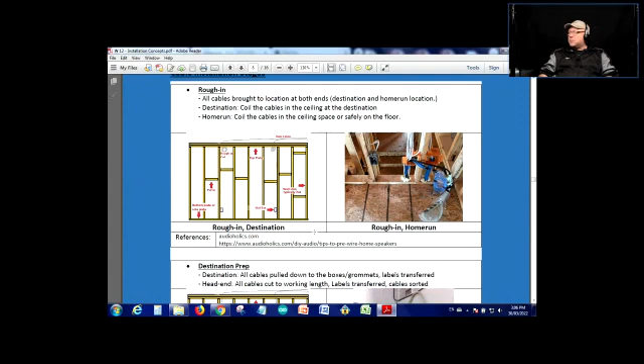All right. So we're going to finish up what we started last time. We talked about possible routes for wiring, and today we're just going to finish that up. I didn't want to rush that because when we rush things, some things might not be covered properly. All right. So today we'll talk about the cable installation or device installation stages. And there's some terminology involved in that.

So the first thing I'm going to talk about is the rough-in stage. And rough-in, I'm going to read that: all cables brought to location at both ends, destination and home run location. So let's distinguish the destination and the home run location. Destination would be where the devices are going to be mounted. So let's say, for example, there is a wall-mounted box or wall box

and you're going to run cables from the home run location, which would usually be a LAN room or some sort of communications closet, right? So all the cables home run to that. And you're going to run the cables from the home location to the destinations all over the place, wherever they might be. And we're not going to install them yet. We're just going to bring the cables there, and we're going to coil them in the ceiling.

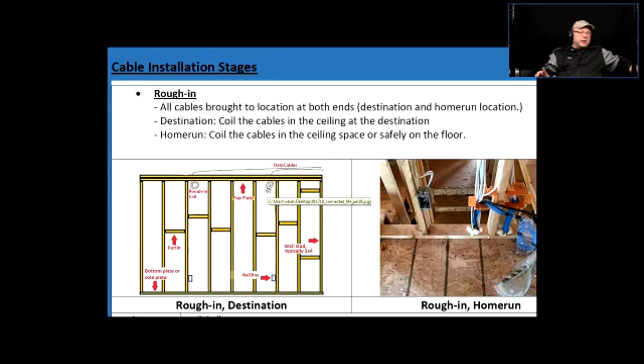All right, for example, like this here. Let's say these are the data cables, and you're just going to bring them to the location, coil them up, and of course, labels on the cables are important. All right, so here's a destination here. It would be a wall-mounted box, for example. And these two cables are just going to be brought to location and not terminated. Just bring them there and deal with them later.

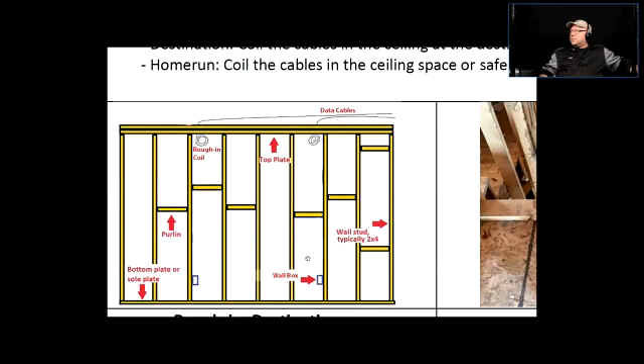Okay, the reason for that is that it speeds up the job efficiency. Because when you do a certain task, you gather a certain type of tools, and you get into the groove of doing certain tasks. So then you can do this more efficiently.

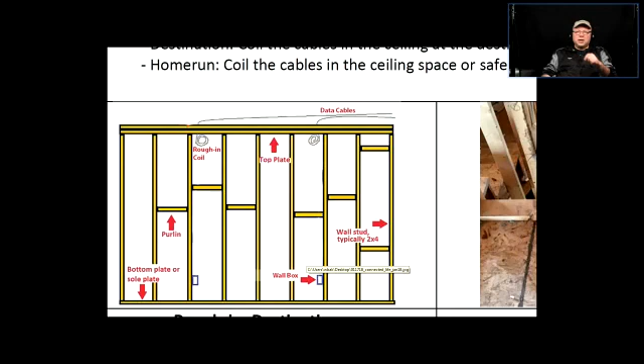Also, most of the time, what you're going to deal with is that the walls or the rest of the building or the rest of the trades are not going to be ready for you to mount the devices, but the cabling has to be done. All right, so roughing in stage. Now, roughing in, for example in this case here, if this is a commercial installation, you would have a drop ceiling, which means the ceiling tiles, and then there will be a ceiling space. So you would just leave those in the ceiling space.

Okay? Now you're going to have to make a judgment for yourself. If there's a timber type of frame, and you can see a horizontal stud, and you know that there's going to be drywall put onto that later on, you're not going to leave the cable right here, because then the drywall is going to come through. It's going to be so much more difficult for you to pull the cable right to the location, to the destination.

So in this case, what I would do is drill the hole right through the top plate, and then maybe drill a hole through the horizontal stud, and bring the cable right to the box, and just coil it and leave it in the box, right? And sometimes I've seen people, and I've done that too, put the cable in a plastic bag, so things are not getting damaged. And sometimes you don't need to do that. You just coil it up and leave it in the destination box here.

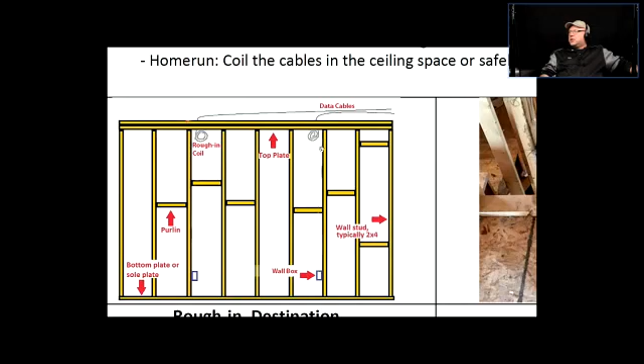If you know that this is an empty space right here, you can just bring it here, all right, and leave it. So you have to make a judgment for yourself. But this is the rough-in installation. Now, examples of a rough-in. So this would be the destination here, just shown as a drawn picture.

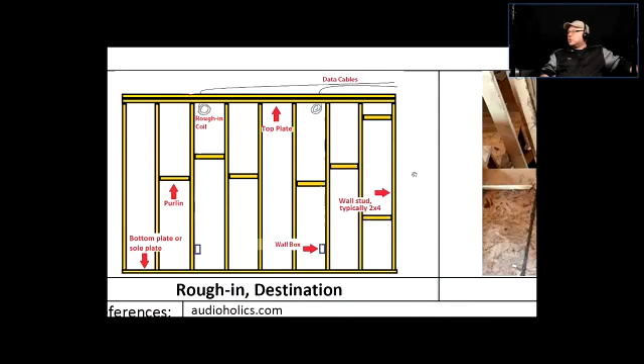And over here, it was a tiny little job I did years ago in a residential setting. It's in the early stages of framing, so the whole thing is already built, but there's no drywall yet. So in this case, there would be very little wiring done compared to some of the bigger commercial installations.

Okay, someone is trying to call me. I'll have to pick up later. Okay.

In this case, there's probably about 10 or 12 cables, maybe less, and I have installed just a grommet here. The drywall is going to come later on, and the cables are coming from the basement, and I just run them through the grommet that I mounted right on the stud, pull the cables through, coil them up and put them out of the way in the plastic bag. So if there's any painters or anybody else, it just lessens the chances of the cables getting damaged. And I just left them like that, out of the way, so people don't step on them. All right.

So this would be the home location. Now, of course, in the commercial setting, you would have a LAN room or communications closet, and most of the LAN rooms have an open ceiling, so there's no drywall there. The LAN rooms are designed in a way that you can run the cables comfortably and change the routing. So most of the time you would just get all those bundles coiled up, and if you can hang them in the ceiling there, so they're out of the way and other trades don't step on them, then that's the way to do it.

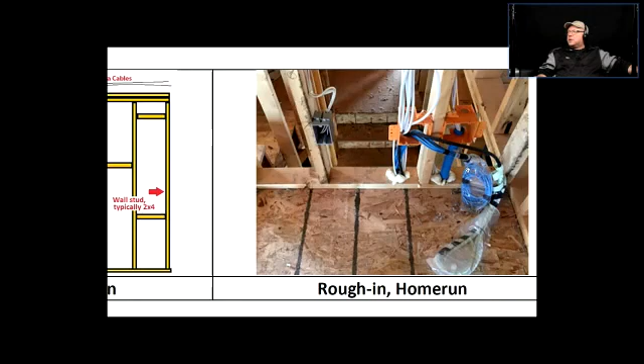Every situation could be different, but roughing in is basically getting cables from one end to the other and left for later processing. And of course, needless to say, but I'm going to say it anyways, make sure that the labels are there, because over here, all you see is a bunch of cables coming from the floor, coiled up in the bundle right here. So you need to know which cable is which, because on the other side, one cable is going to go here, and the other cable is going to go there. You need to keep track of the numbers, and you need to make notes of what goes where.

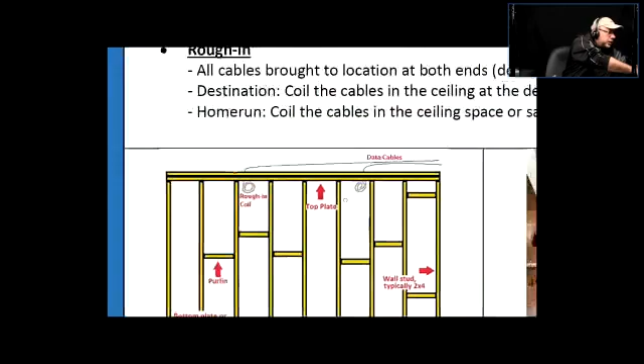So let's see what I have written here, just as a review of this concept. All right, so rough in: all cables brought to location in the home run spot and in the destination location. Okay, so that means here's the destination on one end and there's the home run on the other end. So all cables brought to location at both ends, destination and home run location.

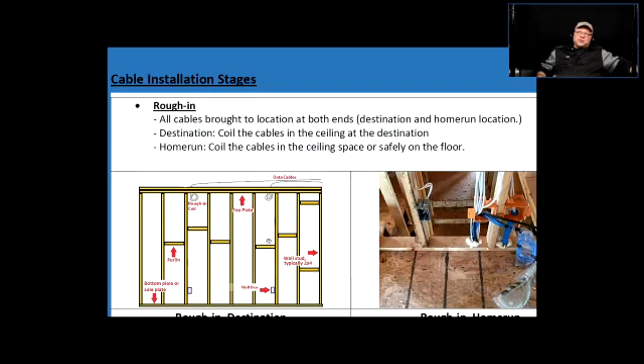Okay, destination: coil the cables in the ceiling at the destination. All right, so basically, as we talked about, sometimes you coil them in the ceiling. What you need to make sure is that after everything is done, like the drywall is put on, maybe the walls are being painted or whatnot, you should have no problem getting them to the box. If you foresee that there's going to be problems after the drywall is put on and things are painted, make sure that you don't paint yourself into a corner by creating a problem for yourself later on.

Right now, home run: coil the cables in the ceiling space or safely on the floor. Right, so here is the rough in, and it will be an installation stage. So sometimes when you work for somebody else, or maybe you are going to run your own business, this would be a stage to get paid for. In the contract, you can just specify that after the first stage of roughing in, this part of the whole bill needs to be paid so you can continue working.

Right? So this eliminates the possibilities, because truth is that some companies go bankrupt or whatnot, and you're not going to wait until you do the whole job and then get one big lump sum after completing the installation. It doesn't work that way. You can do that if you want, but you're running into a risk of losing money. Plus, some of the installations are stretched over a longer period of time. You need to have money to live on, right? So that would be one of the stages, like a milestone point that you get paid for part of the job, right?

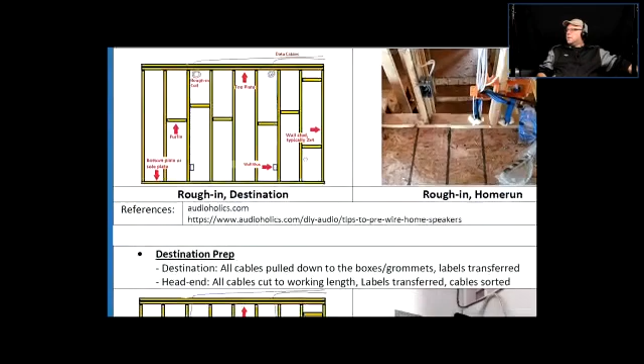So when it comes to running your own business, there's all kinds of other things that need to be considered. This is one of those. This is the strategic way of conducting your business properly, so you don't go under. All right, and you can look at some of the links that I specified here.

Now the next stage will be destination prep. So when it comes to wire pulling, popularly called wire pulling or wire installation, the best thing is to have a team of people, right? Very rarely are you going to run the cables all by yourself. Yes, you can do it, but here's the thing. When you're pulling cables, let's say the job of running the cables is going to take you 10 days. Right?

Actually, let's say a team of 2 people. So 2 of you run the cable as a team, and the job is going to take you 10 days. If you eliminate one person, do you think that instead of 10 days it's going to take you 20 days? No, it is not. Quite often it's going to be tripled, because it just takes longer for one person to run back and forth and deal with all kinds of obstacles. It's quicker. It should be done in teams. All right, so I'm going to continue with that train of thought.

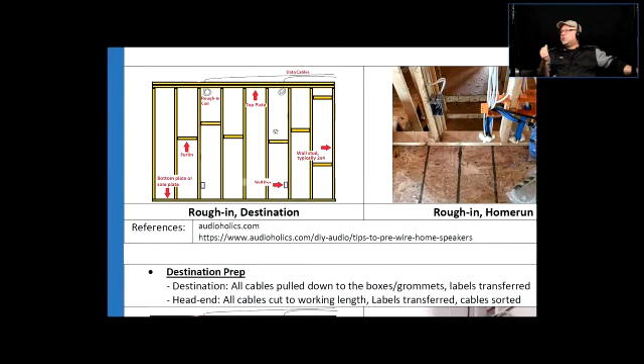So destination preparation, or destination prep. After the cables are roughed in, the next stage would be the preparation. Destination: all cables pulled down to the boxes, grommets, and labels transferred. So you're going to arm yourself with a different set of tools and pull them to the destination, maybe terminate, but not really. The destination prep could be part of the rough in if it needs to be. If you foresee further obstacles, then you can include those 2 stages as one, so you don't create a problem for yourself later.

But usually in the commercial setting, you leave them maybe above the ceiling and then pull them down to the location and transfer the labels. Make sure the labels are always kept intact. So this would be at the destination. At the head end, this is a picture of a job that I did years ago also. That was somewhere in Windsor.

So I have pulled all the cables all the way here so that I undid the loop, laid them on the floor, and then at the head end, all cables cut to working length, labels transferred and cables sorted. This was a relatively small job, so I did this all by myself without a helper. But it would be much quicker with help; the help was just not available at that time and the job had to be done. Sometimes you're going to run into this.

And notice when I was explaining to you the racks, we can see there's an unloaded patch panel right here. Right? And this is the wall-mounted rack instead of a floor-mounted rack. This job, that's all it needed. And here's a raceway that I had to mount. So then during the rough-in, I had all those wires just coiled up right here, left and numbered.

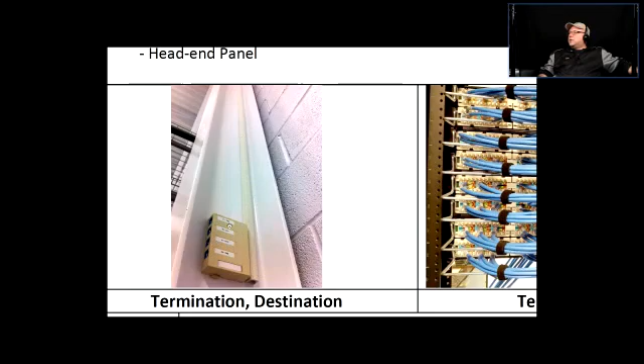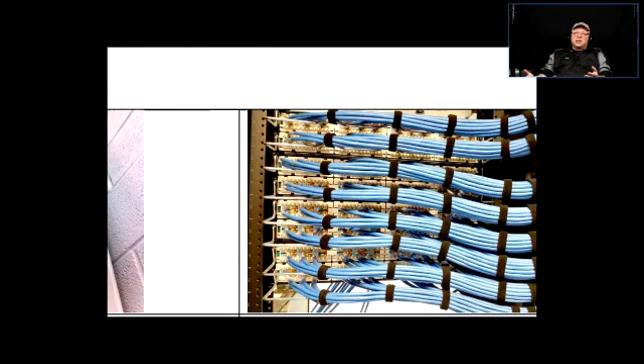So there are 4 wires running in that raceway, and the jack is mounted, and see, they're also labeled. All right. So that'll be the destination termination, and then you're going to terminate the head end as well. This is a picture of something else, not from the same job. But remember, with the current lab that we're doing, we're terminating a patch panel. So this is what a terminated patch panel looks like.

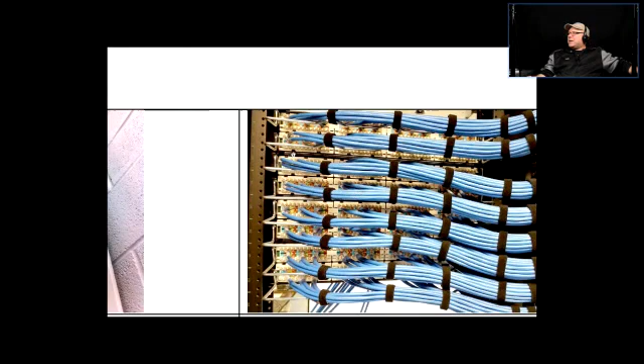And of course, here when I was showing you the rack-mounted patch panel, you can see it's a little bit different way of terminating the patch panel, because there are some support bars here. Maybe I can zoom in a little bit. All right, those metal bars stick out and go all the way across, and the cables are basically run onto that support bar, and they are velcroed, and they are terminated at the specific ports that correspond to the jacks on the other side.

Right? So this is what the home run termination looks like, or head end termination. So that's the next stage. And did I include another stage here that I'm thinking of? Not yet, I didn't. The next stage would be, after the whole thing is installed, testing and troubleshooting.

You pull out the tester, the testing device, and again, the best thing is if two people are doing it. One person comes to the head end with the patch cord, plugs into the jack, and then the other person goes with the remote device, and that remote device is plugged into the individual jacks. Press test. Now the link is going to test okay or not, is going to pass. Now there are two types of testing devices: qualifiers and certifiers.

The one that we use in our classroom for the most part is a qualifier. It qualifies. What does it test for? It checks for the wire map, it checks for the length, and it performs a light duty signal performance test. And if all those three are okay, then it's going to say this link qualifies as Cat5e or Cat6, for example. Then you just do all of them. If it's 100 runs that you do, you have 200 terminations: 100 on one end, and 100 in the field.

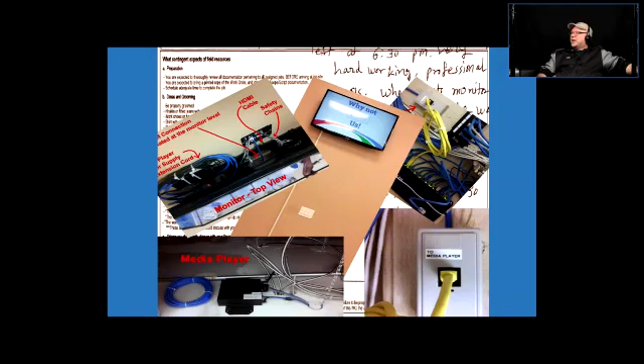So we had to run nice and neat raceway that goes from the monitor right to the outlet, and it was just a power outlet, okay? Because the monitor had to be plugged in, and there was no electrical plug supplied to it. And then I had to take pictures of what's on the head end. What do we do? And I put some arrows and labels and things like that. And of course, I had to put a media player. Remember, we talked about media

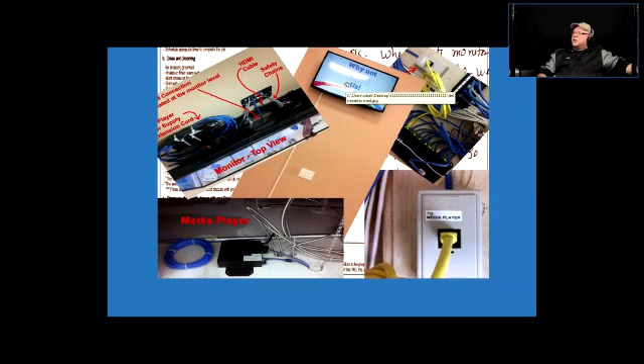players. So basically, what this thing here is, there's a data cable plugged into the media player, and the media player converts all the data into video signal that is being provided to the monitor. And it was a 2 people 1 day job that we did. Okay, so deliverables are at the end.

Now, lastly, we're just going to compare some of the installations just so you can see. And I put a yay or nay to that. All right, so let's see here. This would be a data center somewhere, or a LAN room with all the wires. Now, they're even sorted by different colors, and sometimes yes, you're going to get a request of installing certain colors of the cables for certain purposes.

Like, for example, a very common thing is that all the voice cables need to be white, and all the data cables are going to be blue. All of them are going to be Cat5e cables, and some of them are going to be at the desk location, so the VoIP telephone is plugged into them, right? And then all the data cables that you plug in the computer or other devices, printers and whatnot, they need to be blue, and it's sometimes specified in the contract.

Now, when you terminate the jack and put a faceplate on it, you don't see the colors. But when you go to the LAN room, you're going to see the colors, right? And sometimes clients request that. But this is a very beautiful, nice masterpiece of an installation somewhere. I got this thing on the internet, and there's a reference there in the picture.

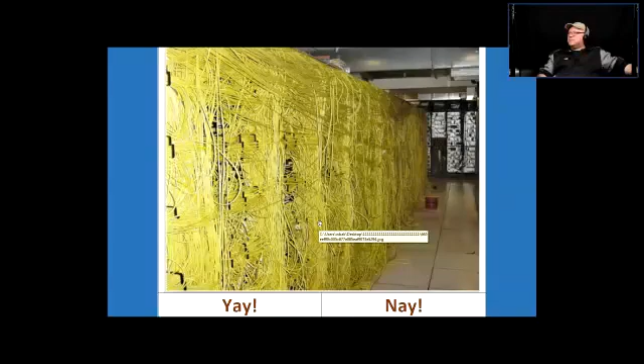So try to avoid things like that. You'll never do things like that. Right? So this will be a yay or nay. Wow, that would be a big nay. No, don't do that, kids. Don't do that at home. Don't do it anywhere.

So they're going to tell you to just basically make a bundle where the wires go over, they jump over each other and so on, to eliminate the possibility of crosstalk. Here's what I have a problem with when it comes to that train of thought. When you have wires beside each other and they are nicely bound, they rest. They are not squished as much as they would be if there are a bunch of cables and some of them are running on top of each other.

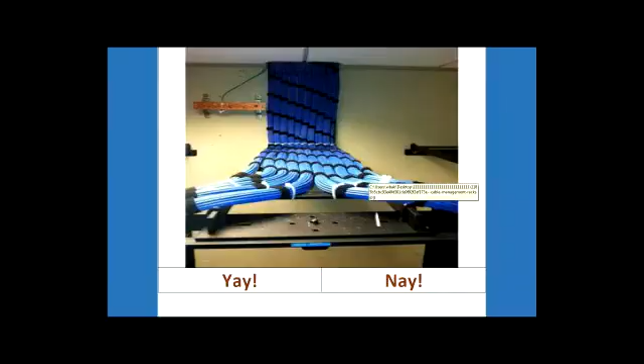And if it's one or two, you can replace it. But if it's like 200 of them, and 80 of them are bad, then it's going to be on you. You're going to have to spend your own time and money if you didn't do it right. That's if you can't point fingers at somebody else, and usually you're not going to do that. So this is good, and it takes time.

Also, when you make a nice and neat installation like this, this is what gets you the next job. Because quite often, if it's a company that hires the same company to do the IT work, if you do a proper job, there's a huge chance that they're going to call you back if they need more work to be done.

But if you do a bad job, you're going to do that once, and if it works, you're going to get paid, but they will never call you again. They call somebody else who can do it this way, like on this picture right here. So yeah, that's a good yes. All right. What's the next picture here?

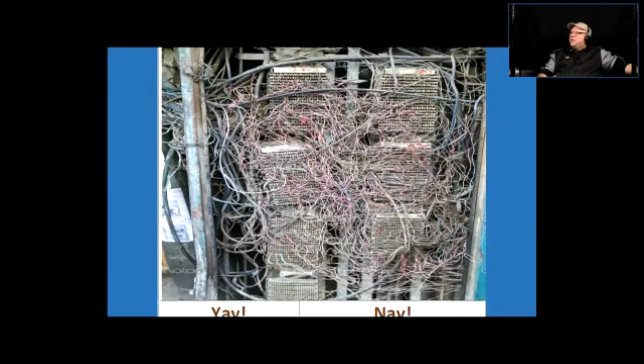Looks like it's a bad telephone installation, or an installation gone bad. These look like either Krone or 66 blocks. They look like Krone, maybe someone from the UK, or some sort of a sketchy neighborhood, who knows. But obviously you're going to see something like that.

With this type of job here, if you try to fix one thing there just by touching it, you can break five other things. So don't breathe on it. So of course, is this a yea or nay? This would be a no, a big no here.

Okay, so yeah. I didn't want to rush. I said it was going to be a shorter class. Again, it wasn't. We got a full length on that. Okay, so this is it for today.